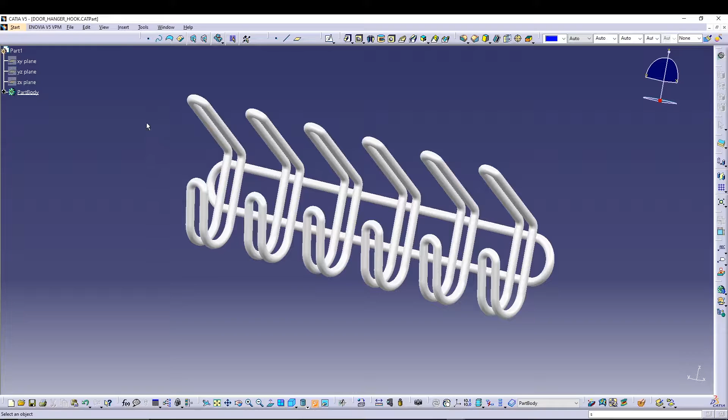So we will be utilizing the generative wireframe surface design, or you can say generative shape design. Both workbenches you can utilize, but I'll be utilizing the wireframe and surface design, and we'll do some sweep operations and stuff like that. So let's see how we can do this.

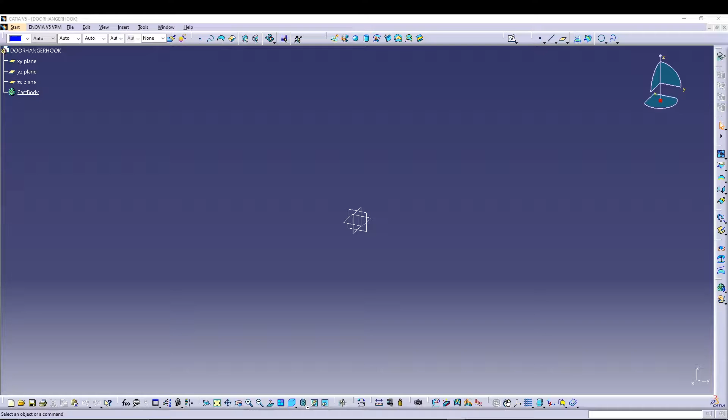Alright, so the very first thing that we will do is we'll do some sketches. Let's start with the YZ plane, go for sketch. Now let's start with the elongated hole.

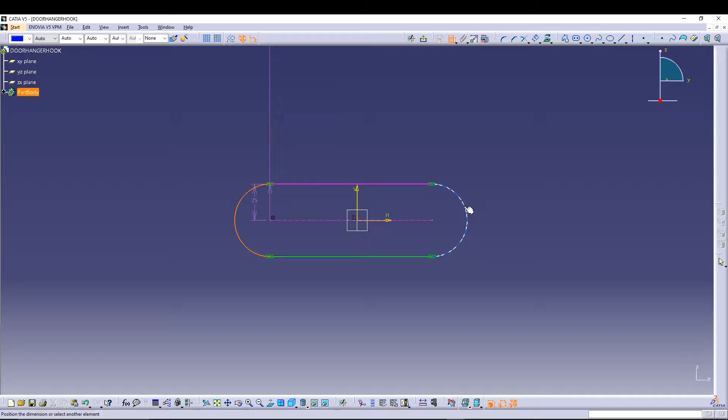We will draw a sketch like this, and then we can change it to 25, and we'll do a constraint from here to here. This should be 500, right? Now you can zoom to fit.

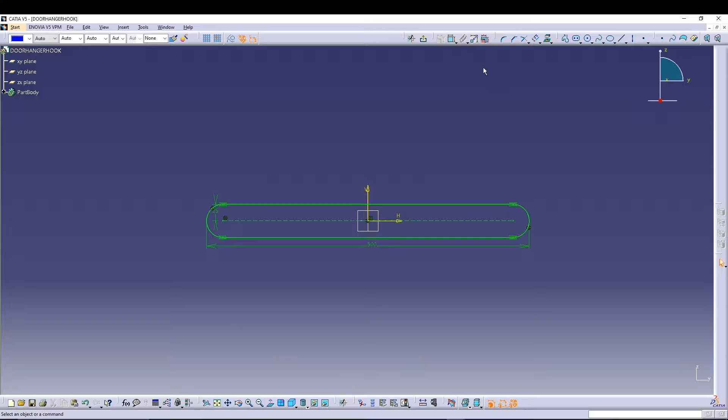After that, we'll do another constraint for symmetry. So let's select this edge, right click, go for allow symmetry line and select the vertical axis. Once you do that, your sketch will be fully constrained. Then you can exit the workbench and leave your sketch like that.

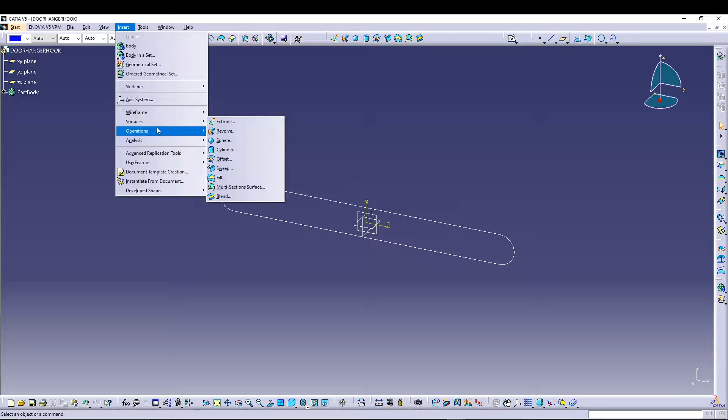The second thing that we will do is we'll create a circle. So from here, you can select circle, or from insert, go for wireframe and then select circle. I'll utilize the circle operation from here, center and radius.

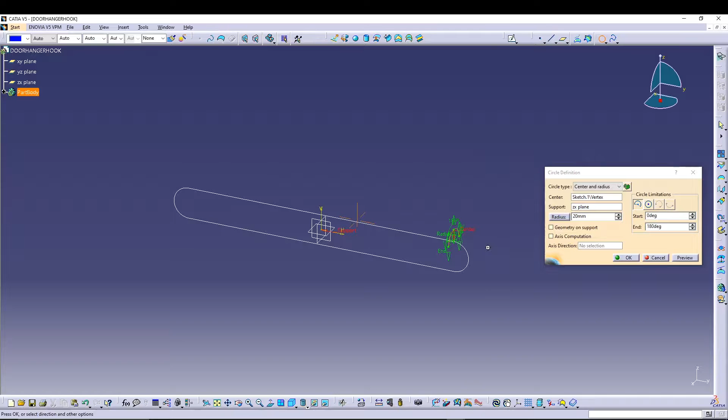Make sure in the center operation you select one of the points of your profile. Now for the support, we'll select ZX plane, and you will see a circle like this. All we have to do is change the radius, and since it is only 180, I'll make it fully 360. Alright, once you are satisfied with your sketch, go for OK, and we have our circle definition.

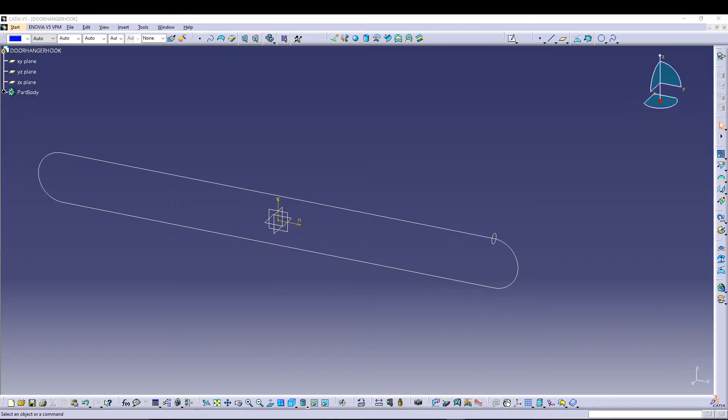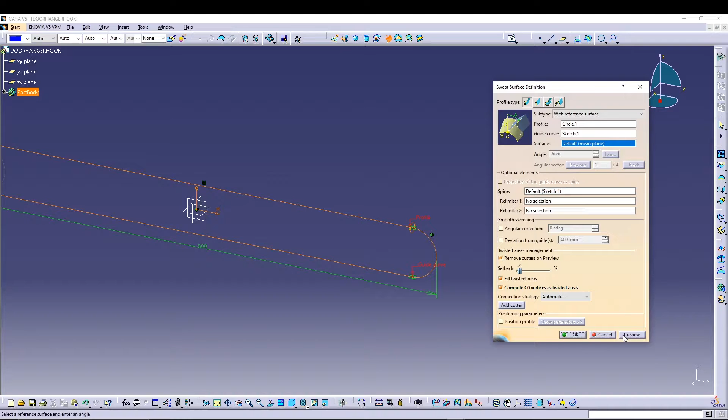Then we can simply utilize our sweep command. So the sweep command is right over here, go for it, and in the explicit profile type, let's go for subtype as with reference surface. In the profile select your circle, and in the guide curve select your sketch one, and go for preview. Once you are done, press OK.

Right, so we have a sweep feature. Now one thing I will do is from the lighting I'll switch it off so it gets more clear. So for the first plane, let's go for plane definition for normal to curve, and we'll select the curve as your sketch one, and the point we will select as, let's say, any of the points.

So select this point. Okay, so once your plane is done, we can go for a sketch 2 on the plane. So let's select your plane, go for a sketch.

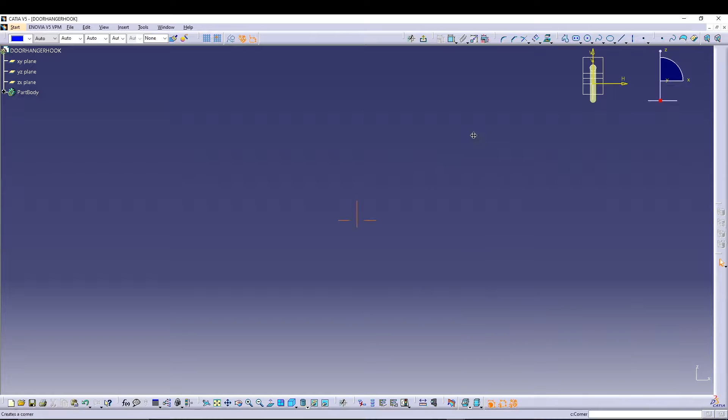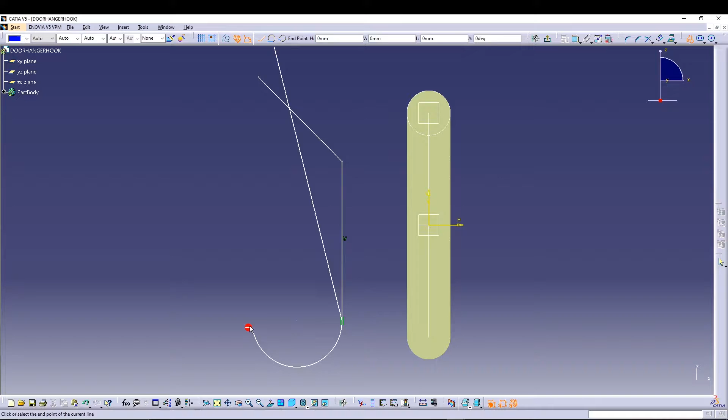Now we will sketch a profile. So let's go for profile like this. We want an arc, so change it to arc like that, and go for line again. Press escape to exit the profile, and then go for constraint, define this dimension.

Define this radius for this one, angle between these two, angle between these two, and this distance, also this distance from the vertical axis. Now the first thing that we'll do is we'll do a corner over here of radius 10.

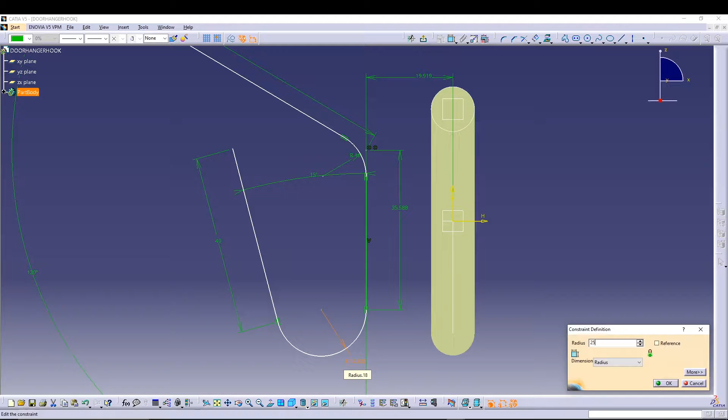And let's change the values now. So go for 100. This angle should be 120. This angle should be 15. This value will be 40. This is 25.

Adjust your sketch like this. And this distance is 10. This distance we have to give, so go for 80. And then what we will do is we'll select this point and this point, go for constraint, right click, allow symmetry line, select your horizontal plane axis.

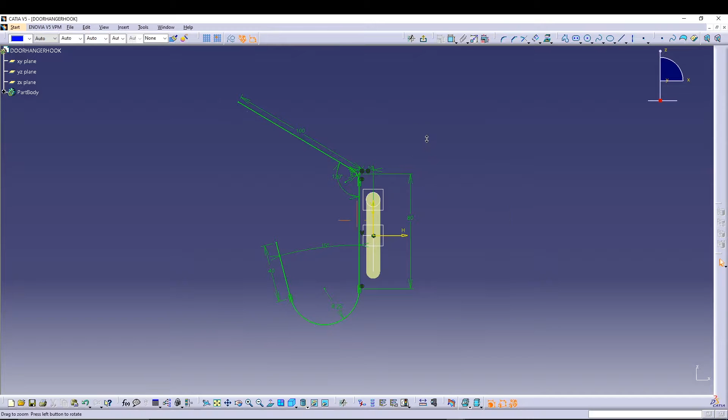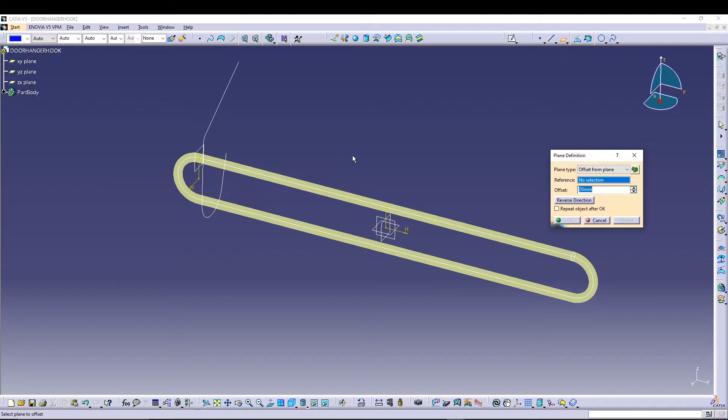So once your sketch is fully constrained, you can exit the workbench, and then we'll do another plane definition. So for that, let's go for plane again, go for offset from plane and select your plane 1 as the reference and reverse direction 20 mm.

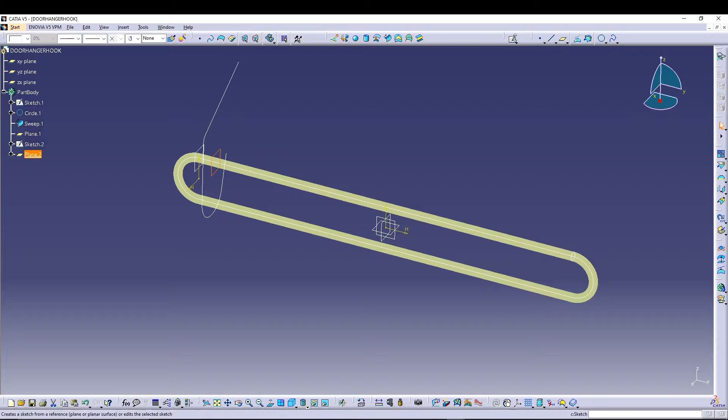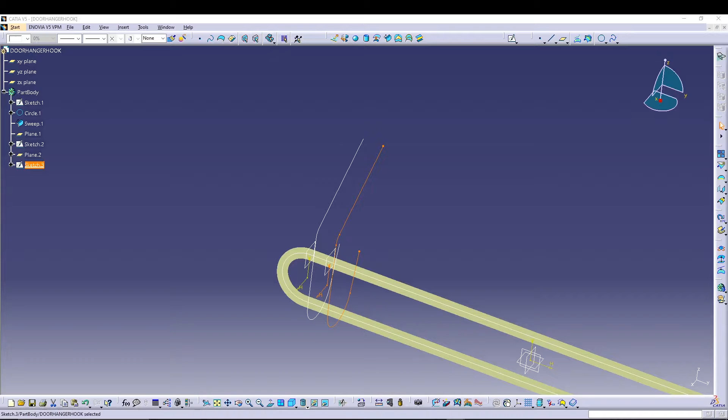After that, select your new plane, which is obviously plane 2, and go for sketch. And for this one, what we can do is we'll just select sketch 2 and go for project 3D elements. You can see it's projected on the desired plane. Okay, after the sketch, we'll need one more plane.

So we need a plane right over at this point. So for that, let's go for plane, normal to curve, and in the curve we'll select this one, and for the point I'll select this. Press OK to complete. Alright, so that's our plane 3, and we'll define one more plane.

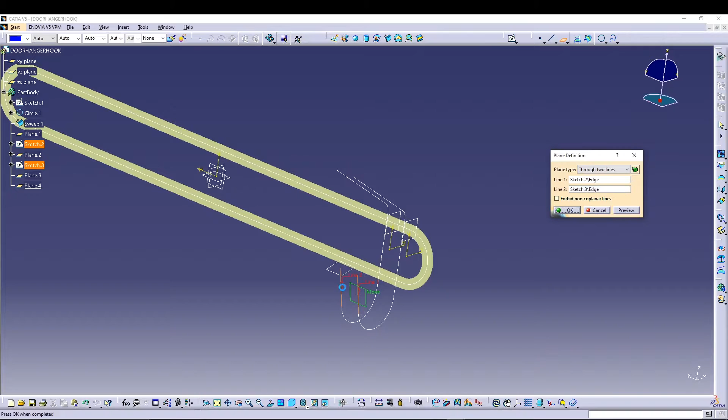So for that, let's go for plane. This time change the plane type to through 2 lines, this one and this one. Right, I think that's fine. Press OK to confirm.

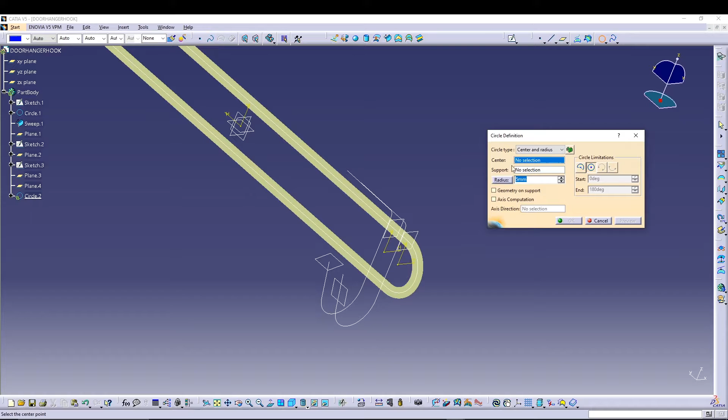After that, we'll select another circle profile. So go for circle definition. This time change the circle type to 2 points and radius. For point 1 you can select this, for point 2 you can select this point. For support you can select the plane 4.

Now we have to reduce the radius, so go for 10, then preview it, but we don't want the full circle, so I will go for complementary circle, and that's what we actually wanted, right? Yeah.

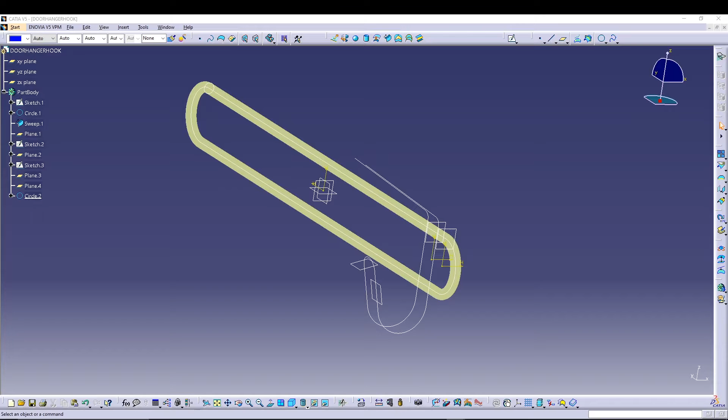Now after that, we'll define one more plane for this thing. So let's go for a plane, same through 2 lines, this line and this line. Okay, now we'll define the circle again through 2 points. So first point, second point, support will be this one, and preview. Okay, right, that's what the profile we want.

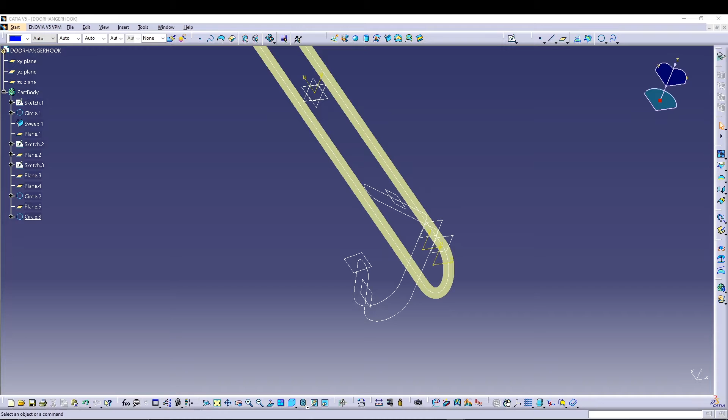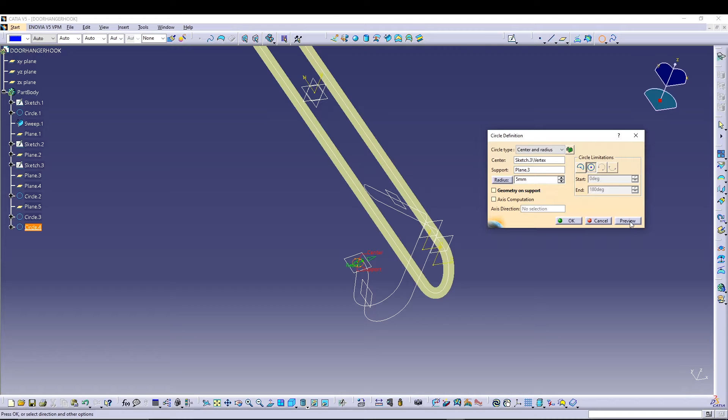After that, what we can do is we can go for another circle. Right, so let's go for circle definition again. Now this time change the type to center and radius. For the center you can select this point, and for the support you can select this plane. Go for complete circle, can preview it. Okay, that's what we wanted, right?

After that we will do sweep. So let's go for sweep definition with the reference surface. Now, so the profile will be this circle and guide curve is this one. Preview. Okay.

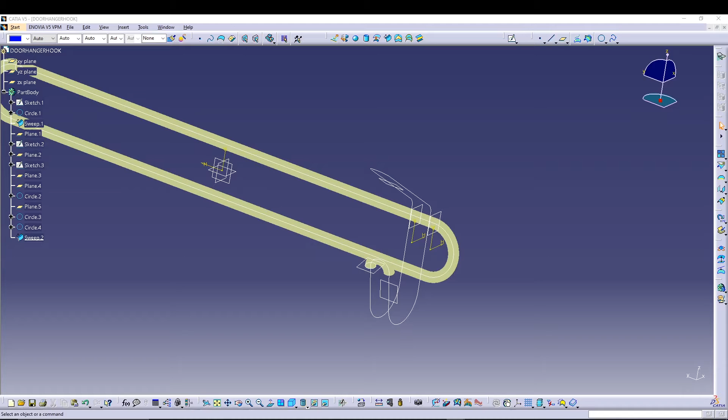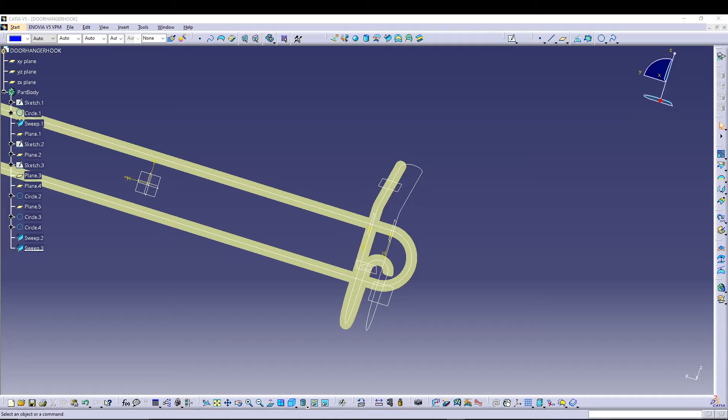Another, we'll repeat this thing for the whole sketch. So let's repeat that. Go for sweep. Select this profile, this guide curve. Okay. Right. Let's repeat it one more time. So go for sweep, profile, curve, preview. Okay.

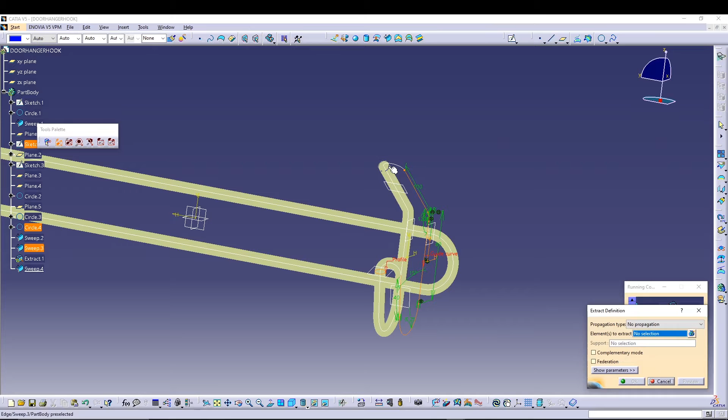Right, so there is some error. So for this one, we'll change the profile to, let's go for extract, and this one. Okay. And for the guide curve, we'll select this one. Now preview it. That's what we wanted.

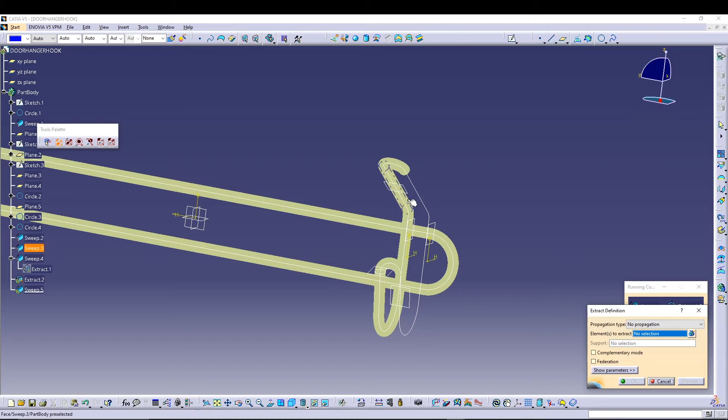We'll repeat the same thing. So go for profile, right click, create extract, select cancel, right click, create extract, like that, select OK, and guide curve, preview. OK. Right, so that's what we have done using the sweep profile, and after that we'll utilize the join tool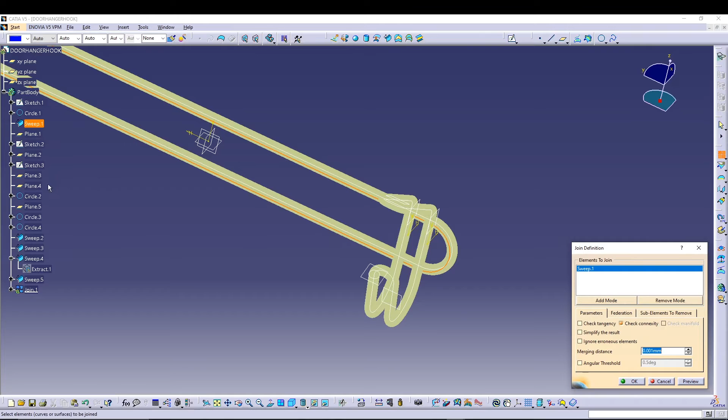to connect all the sweeps, right? So let's go for insert, operation, join, and select sweep 1, 2, 3, 4, 5. Press OK.

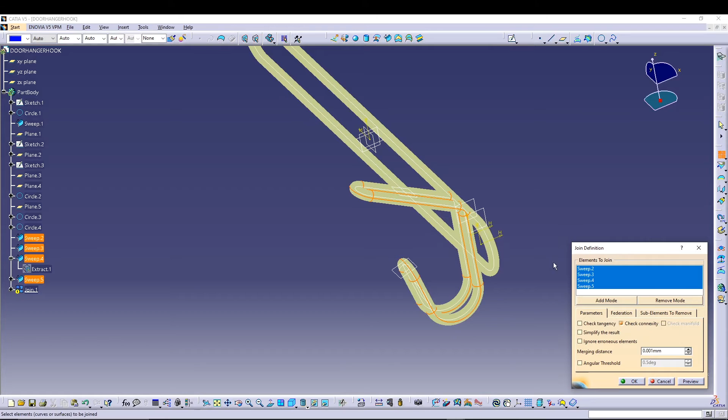Alright, so we have to remove sweep 1. Actually we don't want it. How do we remove it? Can clear selection. Now preview. Okay, so just don't add the sweep 1 in the join, because there will be some issues, and we don't want it also. After that it's very easy.

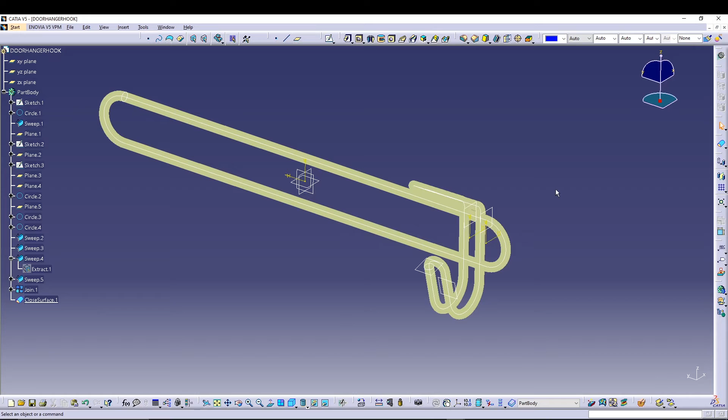All we have to do is go for close surface. So for that, let's change my mechanical design to part design and insert surface based close surface. Let's go for join 1. Okay, and if I hide my join, you can see the surface is now solid.

We'll do the same thing for sweep. So let's go to insert, surface, close surface, select sweep 1. Okay, and then you can hide your sweep 1. So now we have our solid model.

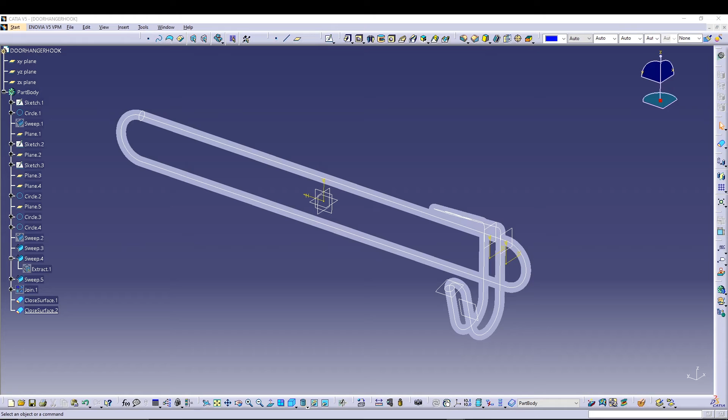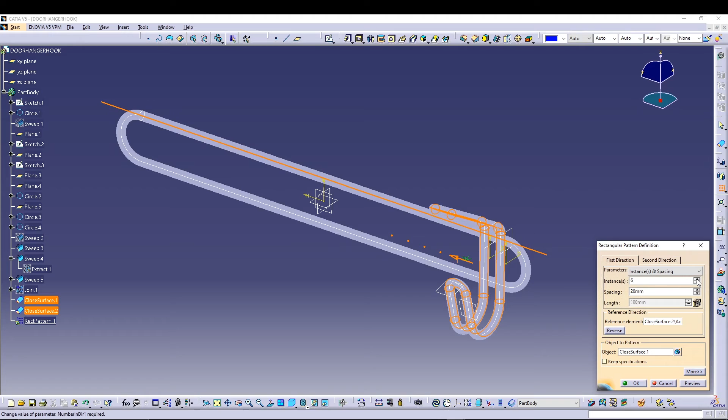And then what we can do is we can simply go for a pattern operation. So let's go for rectangular pattern. In the object to pattern, I will select this thing, and in the reference direction we'll select this one. We want 6 instances and the spacing is 20. So yeah, once you are okay with the preview, you can click OK, and that wraps up the design.

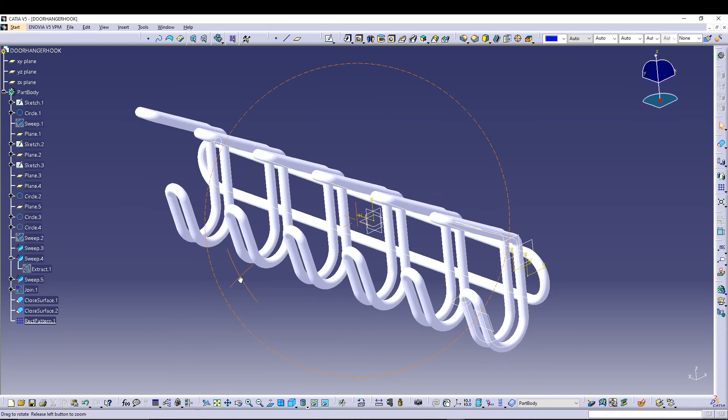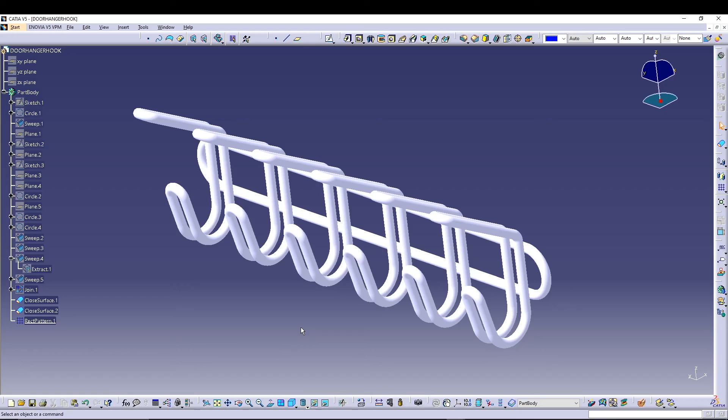Now you can go for view, lighting, and switch out your lights so that it's more visible. And from here you can simply go for hide and show and hide all your sweeps as well as your profile, plane, everything. You can hide your sketch as well, hide all these planes, and that completes the model.

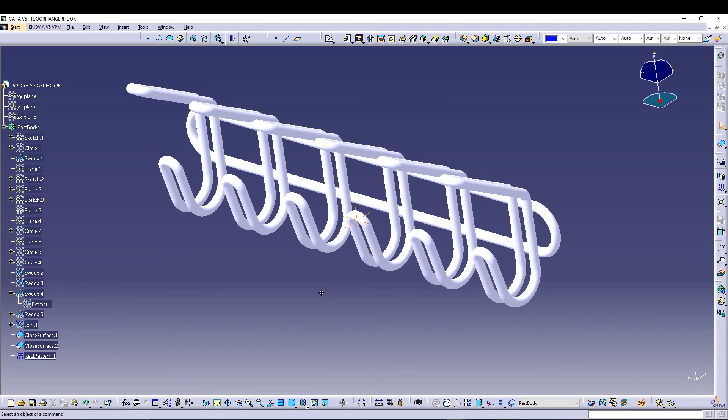So we have quickly utilized the sweep command to create a door hanger hook, and that looks pretty much neat. I think you will understand this how we utilize the sweep command.